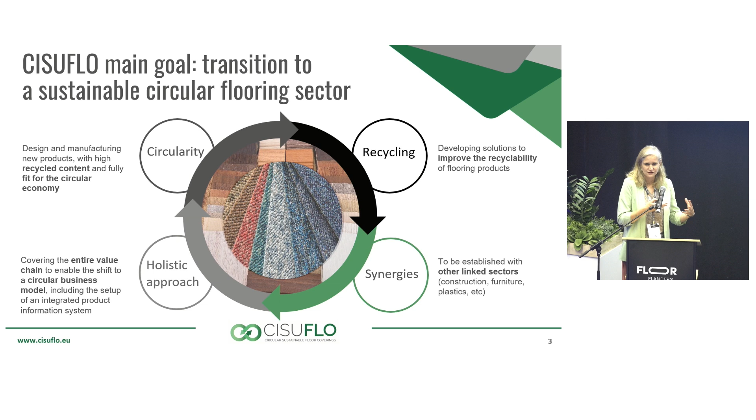Fourth pillar is the synergy. So we look at how we can use our recycling technologies in other sectors. For example, with Deceuninck, who has window profiles, we assess if you can use waste from window profiles in flooring and vice versa. So there are some synergies between different sectors.

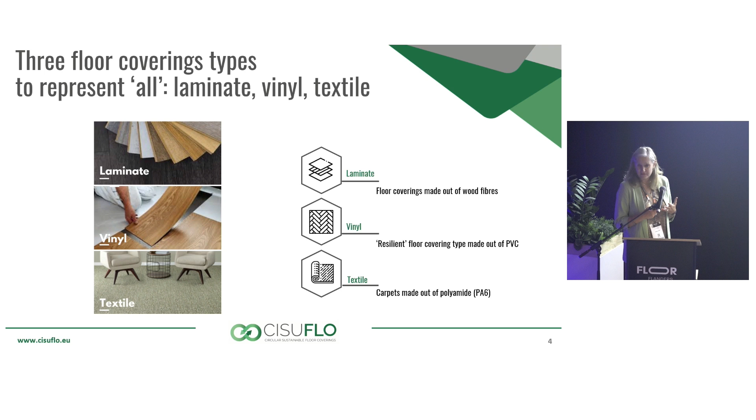As you all know, the world of floor coverings is very diverse. Within the project, we just focus on 3 of them: laminate, vinyl flooring, so the PVC flooring, and the third one is textile, where we predominantly focus on polyamide 6 carpets.

So here you have an overview of our 6 pilots. The first one deals with the production on a more industrial scale of circular floor coverings, which have been redesigned and now are actually being made. The second pilot deals with identification and sorting, so there we also have made a pilot. The third one is the PolySep technology, where we look at separation of multi-layered materials.

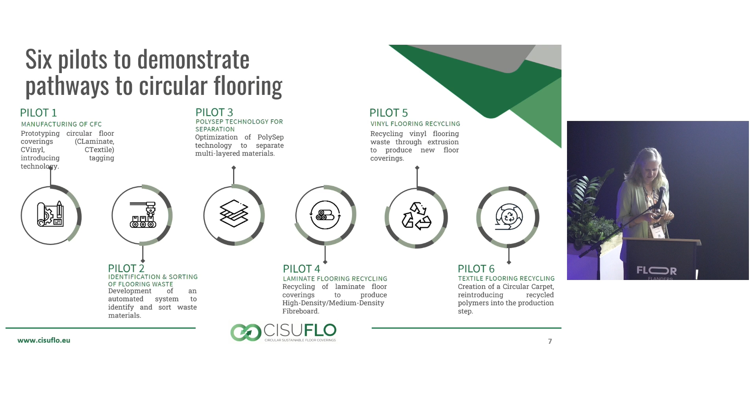And then we have pilots 4, 5, and 6, dealing with laminate recycling, vinyl recycling, and in the end, textile recycling, so carpets and carpet tiles recycling. We have been working a bit in preparatory phases to first do the redesign. So I just highlight here some examples. The first one is, for example, looking at new design and new production methods.

I just took here an example of a carpet where we look at 2 different ways. First one, try to make the carpet monomaterial so that it can be fed as a whole to the recycling process. Second one is a separation layer where we add a specially designed layer in between, and at end of life this can be triggered, allowing to separate the primary and the secondary backing of the carpet.

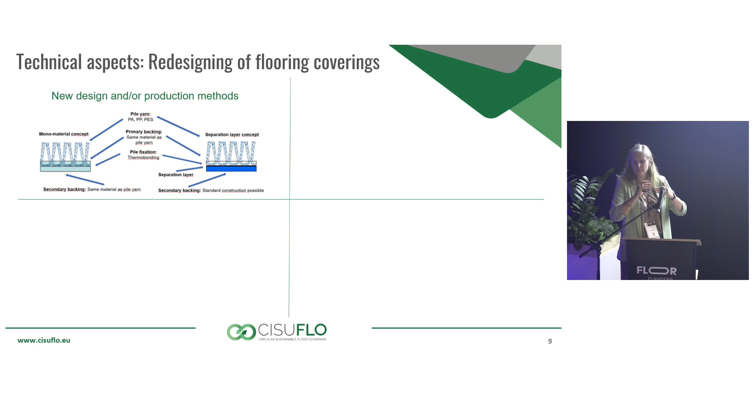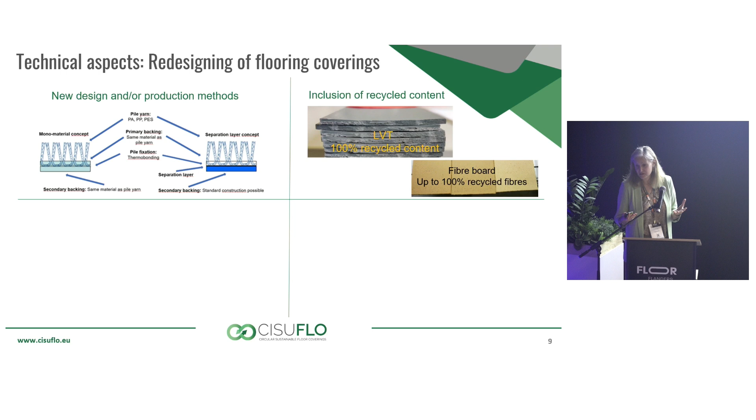The second thing is that we look at the inclusion of recycled content. Just 2 examples here. For the luxury vinyl tile, we are able to put 100% recycled content in the core. And then also, for example, for a fiber board at lab scale, we could make fiber MDF and HDF using 100% of recycled fibers without any problems.

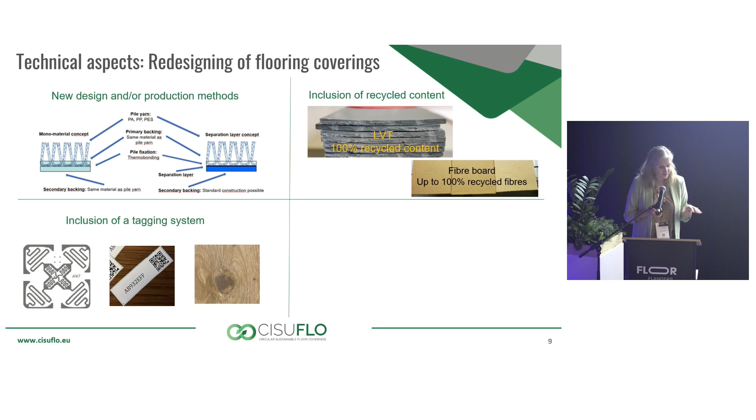We also looked at the tagging of the flooring because that's very important to have the link with the digital product passport. So we have been assessing, for example, QR codes, RFID taggings, and also digital watermarks. So if you want to see some up close at the booth, we have some samples there also.

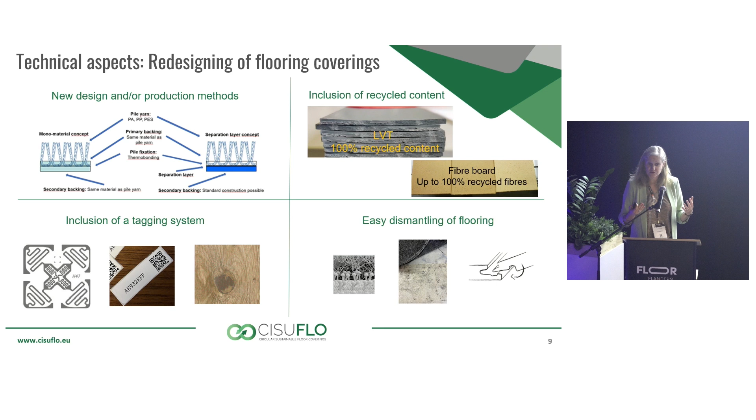And then the fourth one is also how to install the flooring. So how you can easily dismantle without having too much residues attached to your floor covering, which can hamper the recycling process. So this is a bit the technical aspects. There is a deliverable or a report on this, which is available at our website. So if you want to assess this in more detail, you can just download it freely from the website.

Then I just focus more on the piloting phase. So just a few examples on the piloting of circular floor coverings. So first some on the carpets. For example, Aquafil has been working on the production of a carpet with adapted latex backing, one which is more brittle. So when you do the shredding of the material, you can remove more of the latex and you end up with a purer polyamide 6 stream.

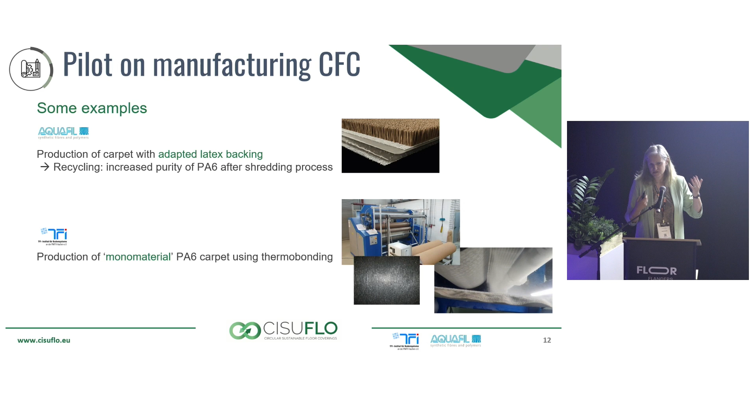Then at TFI, the research institute in Germany, they have been focusing on the production of monomaterial carpet using the thermobonding technology, meaning that you don't use latex, but you actually melt the backside of the piles to have the anchorage. Then at Unilin, they have been looking at the circular laminate, so they have produced a laminate which includes recycled fibers. Then for Beaulieu, we have the circular vinyl, looking first at cushion vinyl to include recycled content. So here you have some cross sections. The amount that we can add is a bit lower, so they're also assessing different other production technologies for this.

And they also looked at replacement of virgin PVC in the LVT, so as said, we can substitute up to 100% there. And then one more niche flooring is the bioflooring from SQIM, which was previously called Mogu. So there we also have been adding different waste streams into mycelium-based acoustic panels and floor panels.

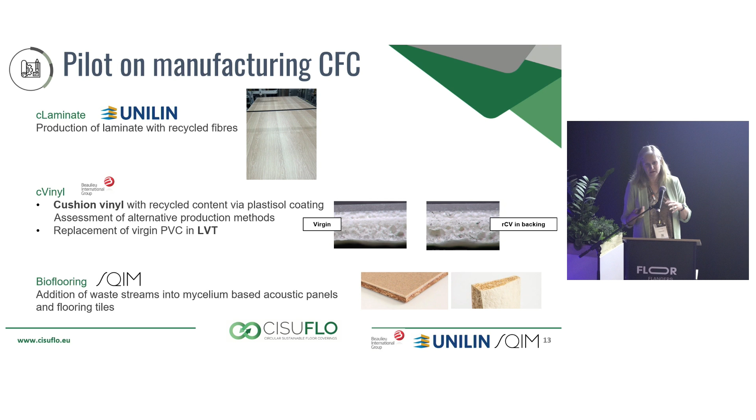So this is just a view of the pilot line for identification and sorting. It has been developed by Rina and is installed at the facilities of Centexbel for the moment. So as you can see here, you have a camera for visual identification of the flooring. You have an RFID reader, a QR code reader. So actually we could do trials and assess the feasibility to separate different types of flooring waste here.

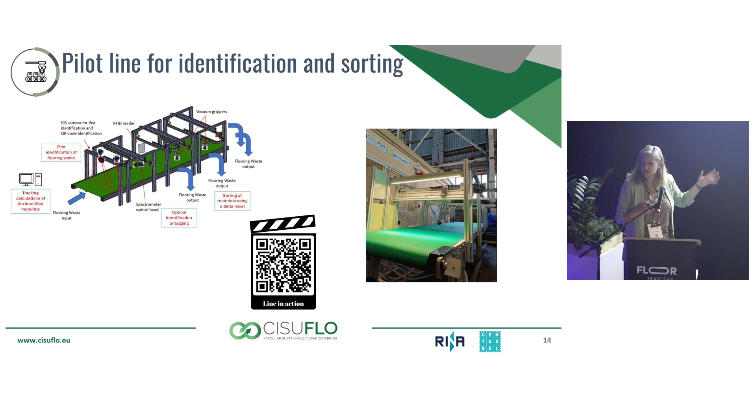So this is a bit how it looks like, schematic and in real life. And then here are also QR codes that you can scan to see the line in action. So then you come to a YouTube movie showing the working process.

Following is the pilot line for separation of multi-layered materials, which is called the Polysep technology. Here actually you have multi-layered material used as input. After a shredding step, you bring it into contact with a solvent, and then you bring it into contact with steam, which is here called the catalyst, but it's actually just steam, which induces flash evaporation and then the delamination of the different layers. And then you still need to separate all those layers into clean streams. So it's a patented technology.

The line is originally designed more for the tarpaulin type of material, so PVC, polyester material. And in CISUFLO, we have been assessing it for vinyl floorings and carpets. But this was not so successful. So it's a research project, not everything works out very well. So we have seen that the line still needs quite some modifications to actually be fully functional with carpets and also for the vinyl flooring.

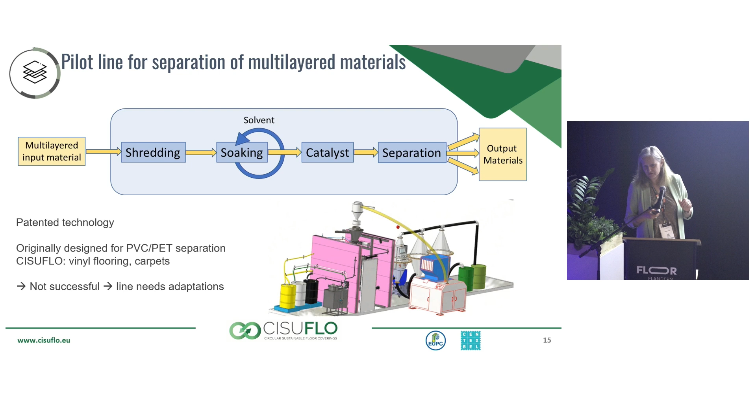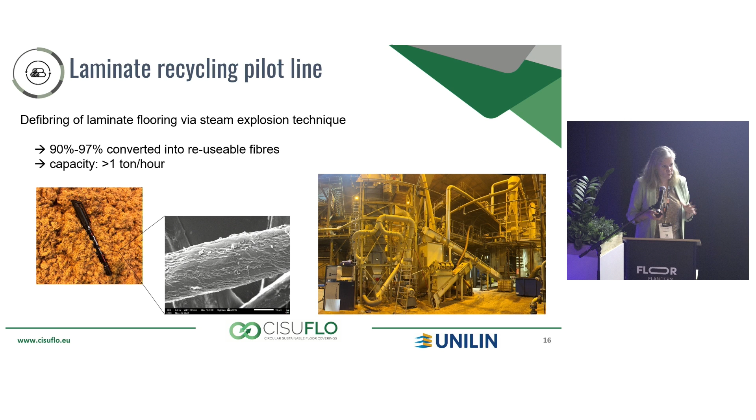Then we go to the laminate recycling line of Unilin. So this is actually a very nice story also. They are able to convert 90 to 97% into reusable fibers with a capacity of over 1 ton per hour now. So as you can see, some microscopic pictures, it nicely contains the structure of the fibers. And this is an overview of the pilot line now, but Sebastian will tell you more about it later on.

The fifth one is vinyl recycling. I just took one example. We did it for cushion vinyl, but also for LVT. So for example, here we had also the cooperation with Deceuninck. So we had old PVC window profiles, which are recycled at the plant of Deceuninck. And then you obtain a PVC powder, which can be added into the LVT.

But secondly, we also looked at more closed loop. So actually, mechanically recycling the LVT, make again PVC, and then introduce it again. Or it can be a combination of both, taking from window profiles, from old LVT and so on, and make a mix of that.

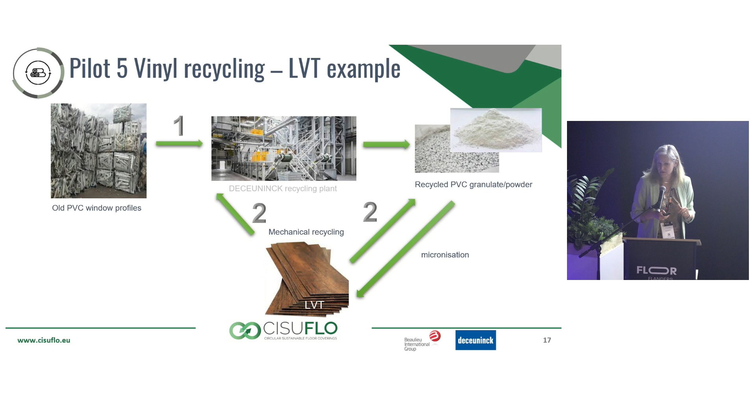Last pilot is the pilot on carpet recycling. So there we actually have a monomaterial carpet being produced by Edel Carpets in the Netherlands. Then in the UK, they have performed installation trials, first on small scale to see what is the best installation method. Should we use certain types of tackifiers or rather tapes or something to have a clean uplifting afterwards?

Then we actually did a use phase simulation, so maintain the carpet. Also, we have some RFID tags underneath to see if we can read out after several months still the signal of the RFID, also for the coupling with the digital product passport. And then both the offcuts during installation and after the use phase, these carpets were sent to Aquafil, who did then the chemical recycling up to the caprolactam, the building block of polyamide 6, and they repolymerize to polyamide 6, make ECONYL yarn, which is then used to produce the carpet again.

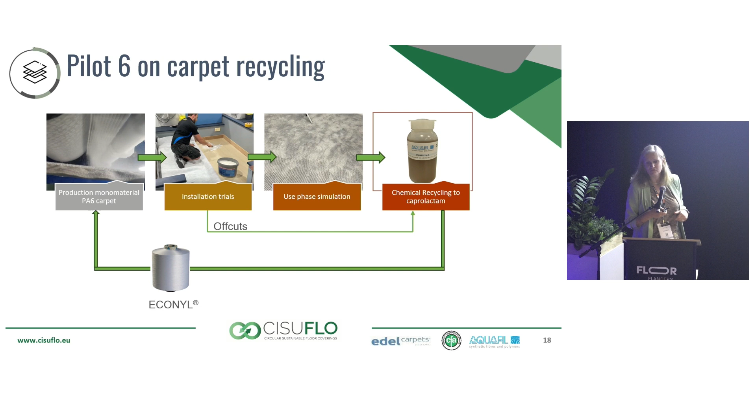We also did quite some overarching activities. I will not go into detail, but just mentioning that. So we have the eProdis Extended Product Information System, which is the digital product passport. We also made a transition support tool where we included some of the results into a more publicly available tool, but Jan will tell you more about this afternoon.

We looked at the circular business models, which will be explained also today, and we looked at the customer engagement, so which type of customers are more likely to take up circular flooring. And then as said, also all the sustainability assessments, the life cycle assessment, techno-economic assessment, and the social life cycle assessment. But this will be all touched upon during the different presentations later on today.

Also, we have quite some reports on the website. Just a few here. We have a white paper on collection and sorting of flooring. We had the first policy brief. We are now finalizing the final policy brief, which will also be available. We also have, for example, now a report which includes all the outcomes of the different pilots we have conducted. So this is also already on the website. So within the coming month, you can expect quite more documents publicly available on our website. So I have the link there, so feel free to take a look afterwards.

So I just want to finish off by saying in nature, nothing is created and nothing is destroyed, but everything is transformed. And that's actually what we are doing also in CISUFLO, trying to transform our waste into new products. So this is, very in brief, a little bit an overview of what we have been doing in the project, and more to come with my colleagues afterwards.